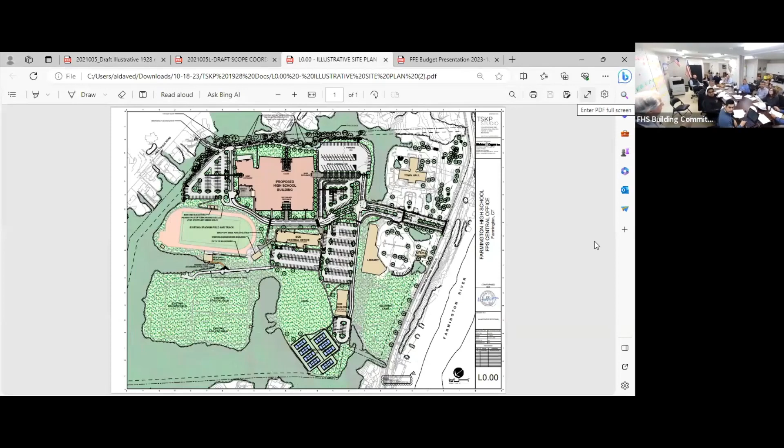This was not handed out, but I sent it to Devin at the last minute. This is just a reminder of where we were before the 1928 referendum was decided. We had placed the tennis courts here, to the south of the 1928 building. Then when the decision was made to include the 1928 building on this site, we had to make some changes. So now we can go to the next slide.

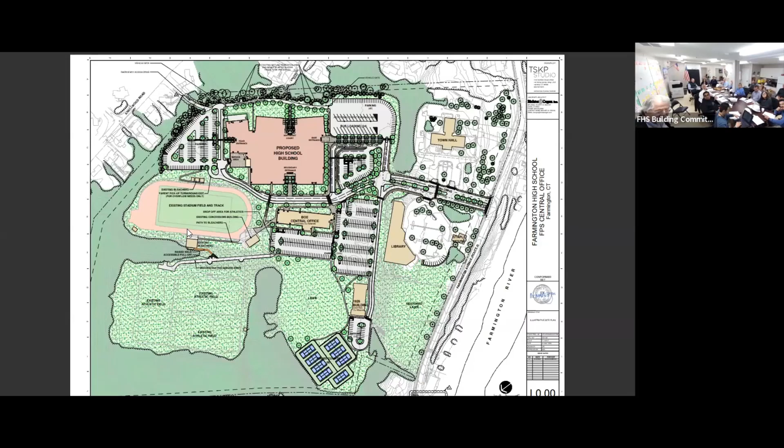So the first thing we did, we had to meet with Silver Petrocelli and determine what's the dividing line between projects. So we created this diagram so we had an understanding between both design teams as to what's in the high school project and what's in the 1928 project. This red dotted line represented that delineation.

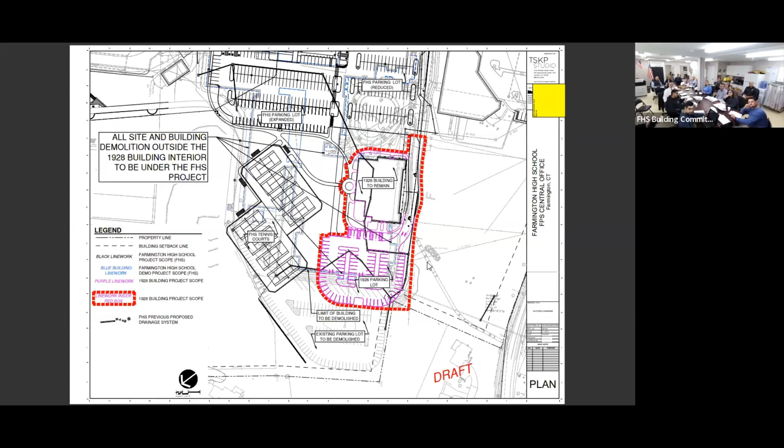And then we've proceeded with the design work. We're now in the design development phase. Next slide.

This is the diagram that was handed out. So you may recall the tennis courts were here. We've now placed them to the northwest direction, north of the 1928 building. The delineation line between projects is shown similarly around the 1928 building and its parking lot, which is located here, to the south of the 1928 building.

So all this diagram represents is changes that have been made in the parking here. The configuration of the parking is a little bit different. And then the same number of tennis courts, 8 tennis courts for the high school. It's exactly what we had previously, only those were located down here.

There's been some changes in the walkways between the parking area, the 1928 building and its parking lot. So those have been now located. And then we have some plantings. I think there are a total of 8 additional trees.

We're going to release not only this drawing, but all of the utility drawings, the topographic drawings to O&G so that O&G can start budgeting.

We're looking for a big credit. Yeah, big credit.

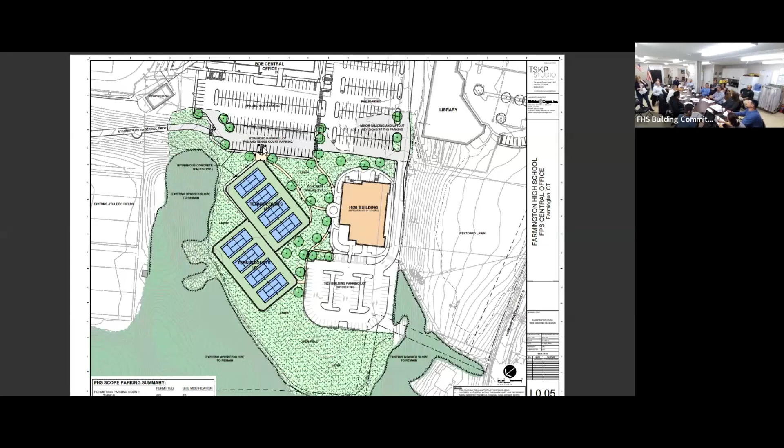Okay, Susan. Yeah, Susan's giving an FF&E presentation, because later in the agenda there is a motion to approve the bid package. So we'll get through it now during the architect report, so when we get to the motion, this is related.

I just want to start off by letting you guys know we had a really great team to work with. Sam helped us out, Scott was involved, Russ was involved, and Kim and Kathy all contributed quite a bit. We spent a lot of time looking at furniture, kicking the tires. There was a pilot classroom, we got samples in, we visited showrooms. So there was a lot of thought that went into all of this furniture to begin with. The whole concept is we want to make sure it's stuff that's going to last, that works for you today and works for your curriculum later down the line. In light of that, we made sure everything was as flexible as possible. We want the students to be happy and comfortable, because when students are comfortable, they learn better.

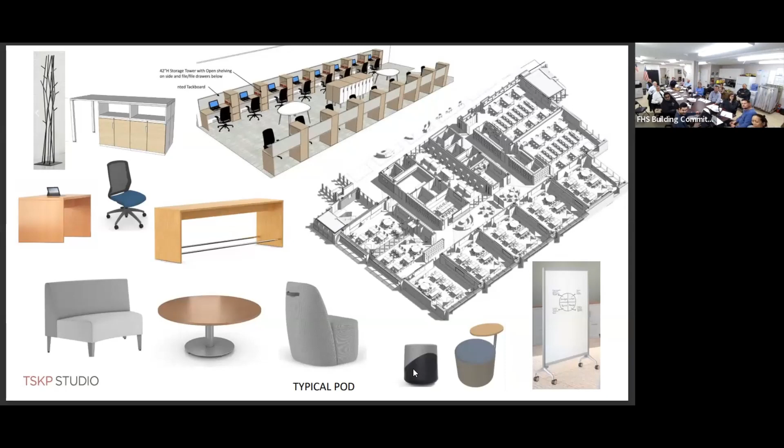Just to hone in a little on what we have for the classrooms, we have an array of furniture. We spent a lot of time looking at classroom furniture, and this will give you maximum flexibility so students will have a choice. They can sit at desks, standing height tables, or round tables.

All of these things can be moved around, they're all on casters. The desks themselves are like wheelbarrow type movement, so they have casters on two legs and just glide on the others. They also stack, so if the teacher wants to open up the classroom and have a lesson, they can pile them up, push them off to the side, and everything can be done on the fly with no downtime trying to rearrange the classroom.

These are standing height flip top tables that will have a dry erase work surface, so students can collaborate, flip it up, and share what they did with the rest of the class. We also have mobile triangular tables that are standing height with a little foot bar for further collaboration. And this is the half round table you see here, which will have casters even though we just wanted a picture of it.

For the seating, the chairs you see up there have been tested. They're very, very comfortable and durable, and they have a lifetime warranty. We have adjustable height wobble stools, task stools, and these cantilever chairs that have a little bit of bounce to them, which makes them really comfortable.

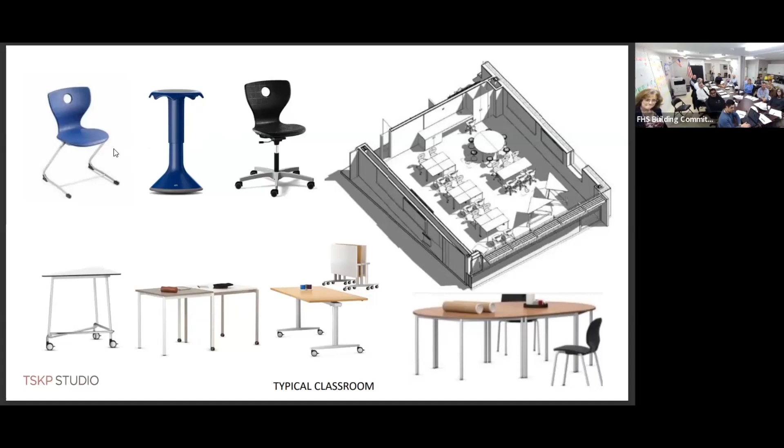Moving on, this is the main concourse you guys just walked through, and this should give you an idea of the aesthetic we were going for. We wanted something to really have that feel—it does sort of have that mall feel, university feel, better word. That's really what we were aiming for with this, and you'll see it in the cafeteria as well. We really wanted it to feel like a grown-up space, not super institutional looking.

So we have plenty of soft furnishings, high tops and low tops and bar stools, and some planters in here. This particular piece is a mobile green wall that will come with its own little tank, like a 20-gallon tank, and grow lights, and it's self-watering. I made sure these are located where you have power in the floor. Kim was talking about possibly opening up a horticultural program, and this could be part of that, as well as the plantings in the planters themselves.

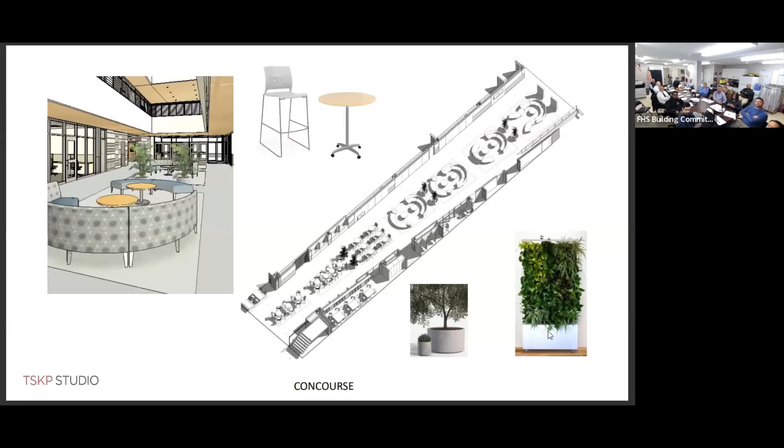Cafeteria—again, we're going to have some more planters. And what we decided to do to break up the space a bit and bring down the scale, we've got rows of these banquettes you see here with dividers between them. This gives them not just a way to break up the space, but also an alternative place for kids to sit when they're eating.

The chairs are high density stackers, and the tables will all be mobile flip top tables so custodians can roll them together and off to the side to clean. I know Sam would have liked something different because of maintenance, but we were trying to avoid the institutional look we'd get with folding cafeteria tables that have attached seats. So this felt like a compromise.

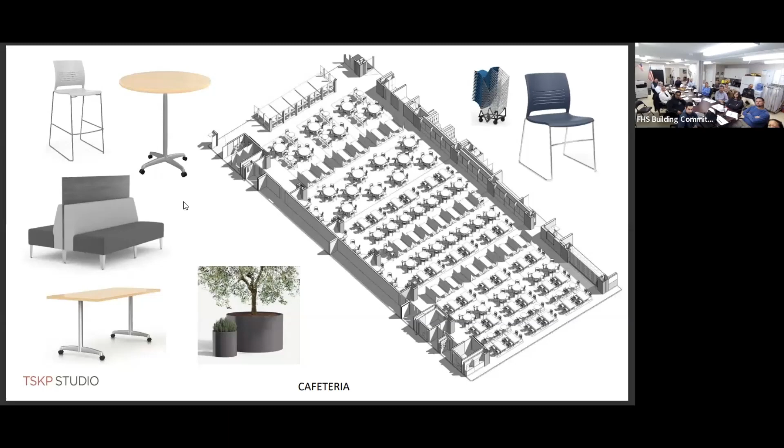Now we're looking at the media center, which looks down over the cafeteria. It has plenty of soft seating, places like these pods, privacy pods with seating that has privacy sides. This gives kids a place to study independently, but there are also a lot of places for them to collaborate. And of course, the library is no longer really a library, it's a media center.

Because there's so much electronics these days, power will be located in a lot of the pieces of furniture so students can plug in and charge up while working in there.

Over here is where you see the Edge Studio. We're going to have a TV broadcast desk in the furniture package, and then there's the media center classroom, and we have a special workroom over here. So let's go to the next one.

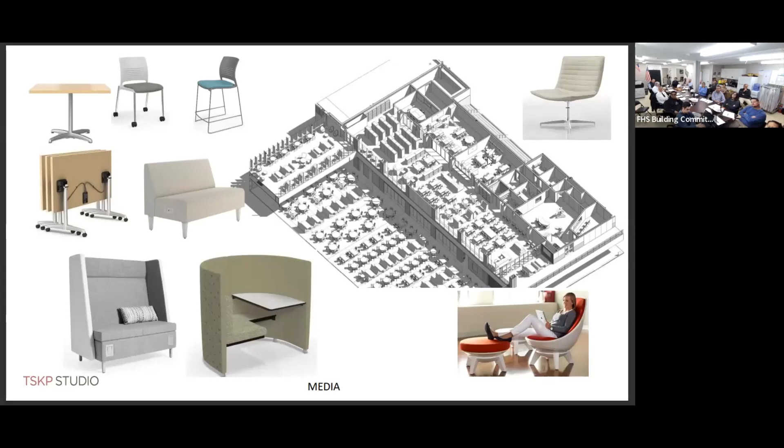The offices, this is typical of the furniture you'll see in the office. It depends on who's using the office, how often they're in there, and their particular needs. So if they need more storage, they'll have more storage, and if they only need a place to touch down, that's what we'll give them. This just gives you a general idea of the aesthetic we're going to have.

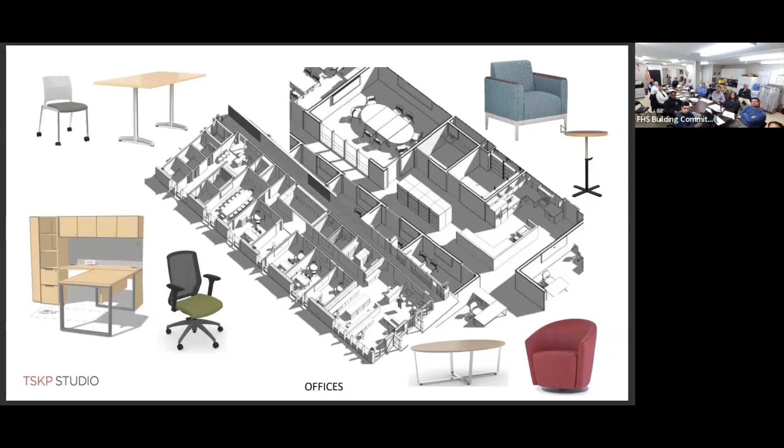These pieces are examples of what you might see in some of the waiting areas in the main office and outside in the career and counseling offices. There are a lot of admin places in this building.

We've got just your main office, of course the career counseling center, all the department heads, all of the athletic department people, the coaches, everybody—there's a lot of people. You also have your sped people, your alt high school, and everything else. So there will be quite a bit of admin furniture in this package.

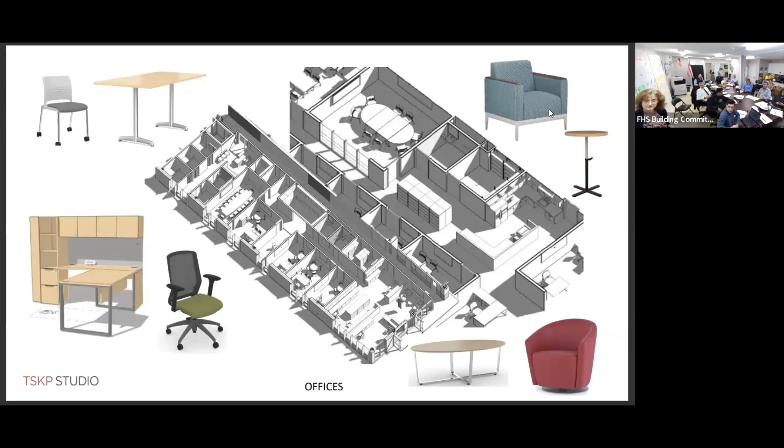Okay, so this is the music area. We want to make sure we're providing secure storage for the students' instruments because they're pretty high value product, and we don't want anything walking away.

You can see here in the corridor, this is where we have a lot of the music storage, and there are also two rooms in between—this is the band room, that's the vocal room. In between is storage for things on open carts, like string instruments. Each of these two rooms will also have a conductor stand and music stands. These are posture chairs specially made for people playing musical instruments. I think that's it for this.

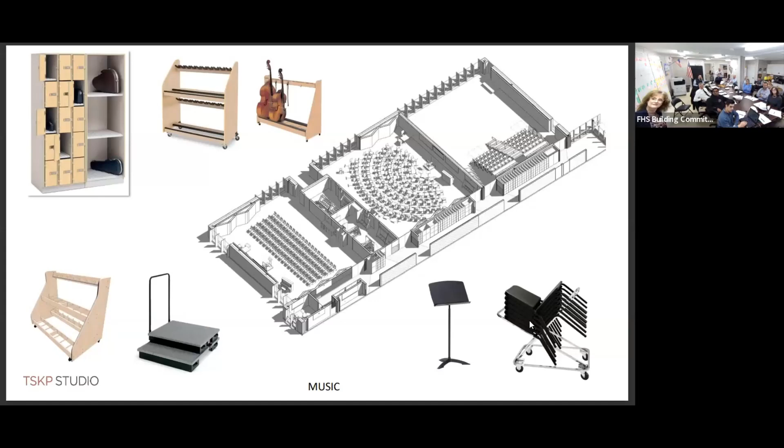Okay, art studio. We have this entire C-wing, second floor basically for art, and we have a ceramic studio with a kiln. We've got what you can see here for equipment—we have a pug mill, which they use to recycle all the scraps of clay after class because there's always leftover. We have a clay extruder, a ware cart, and a wedging table.

All of the teachers, all of these classrooms are going to have some version of mobile storage in them. Again, that's in the name of flexibility—trying to make sure that if you have greater need for storage in another room at some point, you can just wheel it into another space.

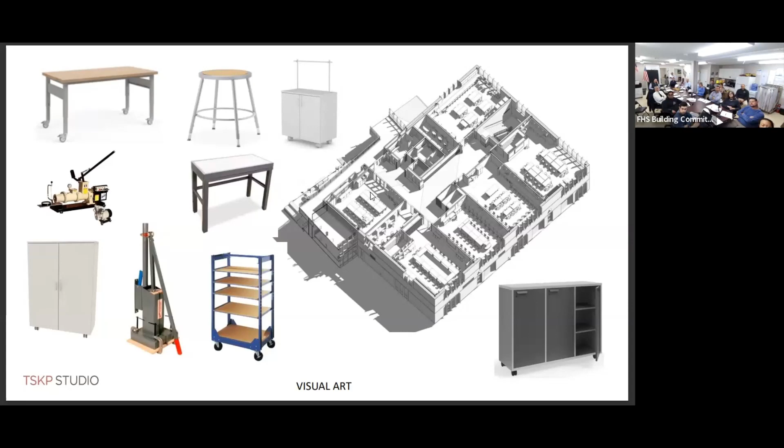So this is your 2D room, you have a digital room, a photography room, a craft room, and then this is a maker space right here. That's going to have a little flexibility to it, but will basically be overseen by the art department. On the first floor, just below this, there's a STEAM lab as well, and I'll talk about that in just a second.

Let's go to the next slide. Here we go, technology—so these right here are the engineering room and the app lab.

You were standing in the engineering room when we were looking down into the gymnasium - sorry, it wasn't the cafeteria. So that was the engineering room we were standing in and looking down into. And the app lab is right next to it.

This is for very technology heavy courses. Aside from having the computer desks, which they're going to need, they have a huge amount of product they need to store. So because they needed additional work surface for projects and everything else, we are providing them with these mobile storage units. Some of these will have power in the work surface so they can plug in whatever it is that they're working with.

It's a mix of different types of storage so they can have that flexibility. Another thing is we're hoping to have slat wall all around the perimeter - we should have it. We're also specifying all of the accessories that go with that slat wall, again in the name of flexibility, so those pieces can be rearranged however they need in order to accommodate the products they need to store.

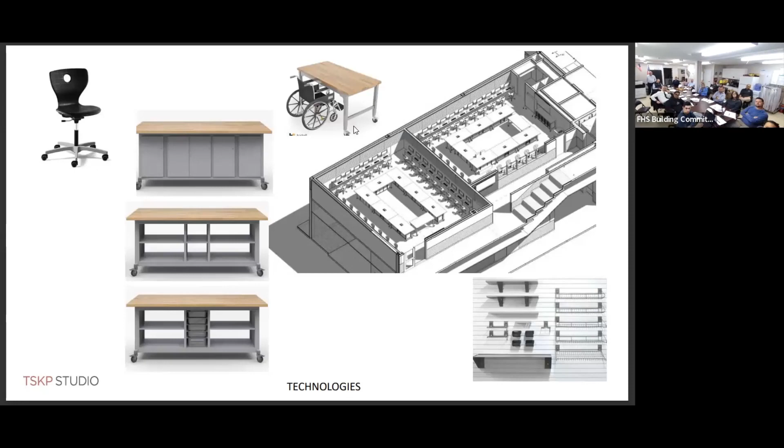So the bottom line is we had a dollar budget of 3.6 million. The estimate is 3,428,429, and that will leave us with a contingency of 171,571. Hopefully, if you guys are all on board with this, we would be thrilled to get the approval tonight.

If you need to see anything else, this is sort of a high level view. I didn't want to bore you guys with all the little itty bitty things because they can get pretty boring. But in the packages that went out, you will see the item data sheets, which had every single piece of furniture in the entire building. So if you want to drill down and really see it, you can look in those packages. That's the end of my presentation. Does anyone have any questions?

No, I don't think we'll do that. So let's talk about the cafeteria, just because I also work in a high school and I see the custodial staff - it's a lot of time, every single day you're moving every single chair. So did you guys look into that as an option? I know you don't want the industrial feel.

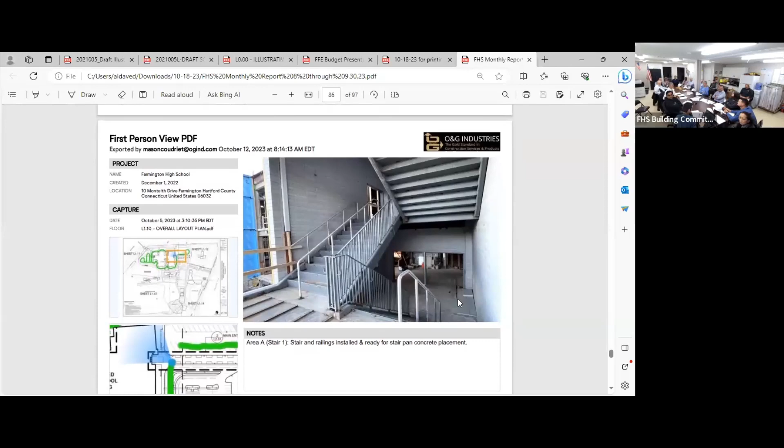I'm not going to go through all the pictures, but my report is self-explanatory. Those photos are all from last week, period ending, but I like to get photos a little bit later.

So basically, your building A pod is on the far end, your building B pod -- as of this point this week, all those windows are in, and they're starting the sunshades on that east elevation.

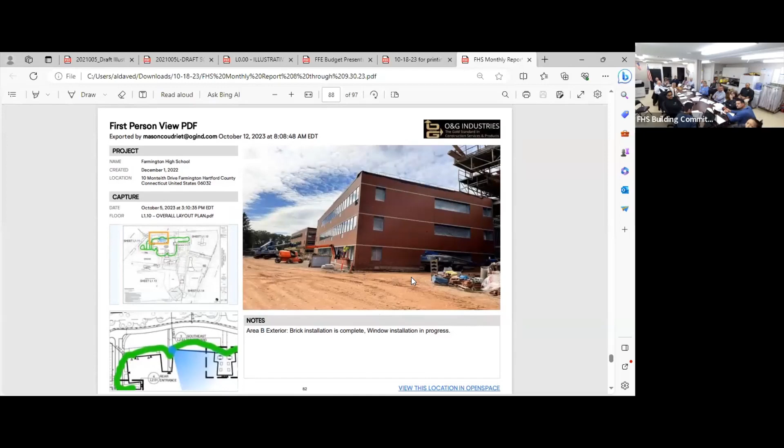That's your third floor. We weren't able to get up there, so your breakout space -- Susan showed you the furniture package. You'll have furniture here and back here, but you're going to have coffered ceilings with skylights, so that third floor space is going to get a lot of natural light.

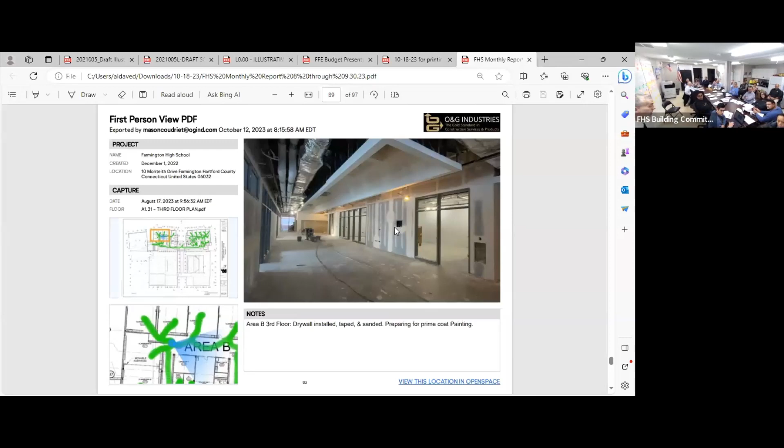And then you have your teacher's workroom, with some monitors here for a teaching wall. I think these are the small group breakout rooms.

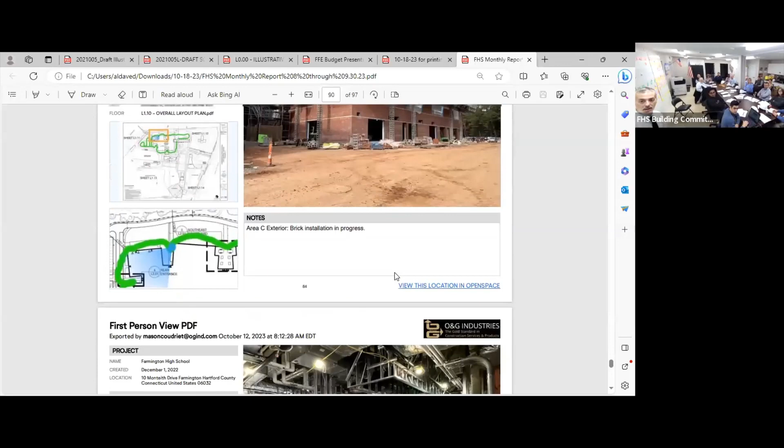Last week they had the scaffolding up, this week they're washing down. So this hydromobile scaffold is on the opposite end of the building. The overhead doors on the inside have been installed, so you have your wood shop on this side and your auto shop, which will have your car lifts, on the opposite end.

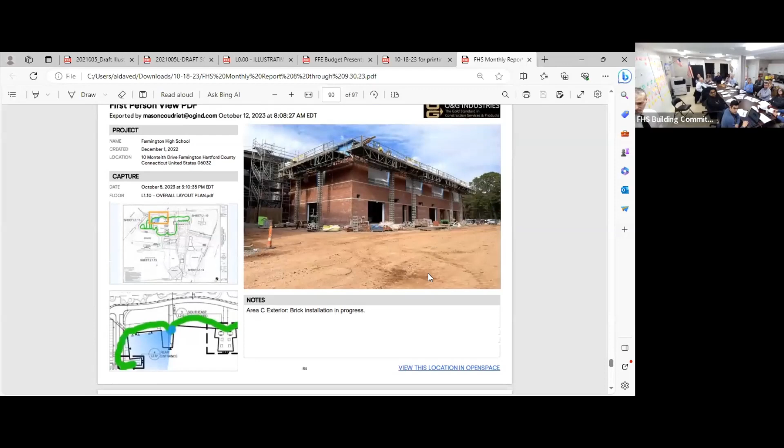This is the area C art studio wing, where you have your 2D, your 3D technology, and your STEAM classroom. This is going to be another coffered ceiling. This is on the second floor, because that part of the building only has two floors.

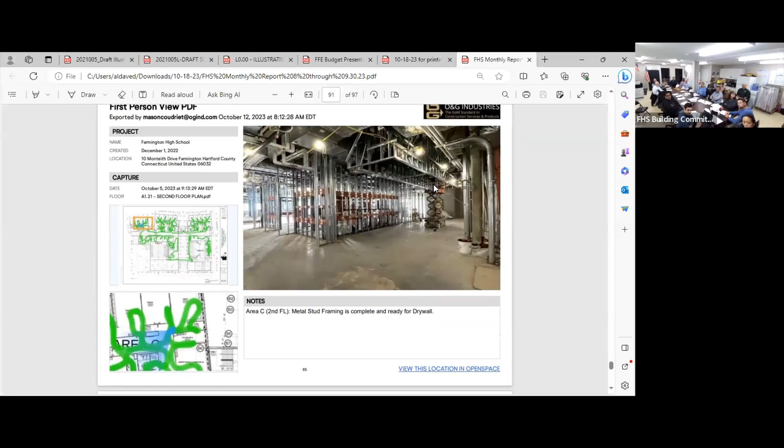Back of house mechanical room -- this is behind the culinary area. There's more mechanicals installed as of this week, but this was last week's photos.

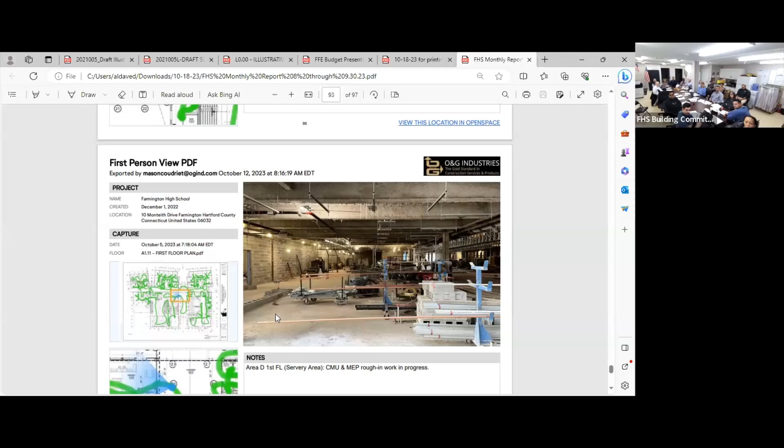This is the cafeteria servery area. Where we were at, we saw it on the first floor -- in the direction we were looking, it was to your right-hand side. The kids' point of sales, your kiosks, your servery tables will all be in this area. They already started the first course of block, and on the far end they started that ground face as well, but you can't see it in this picture.

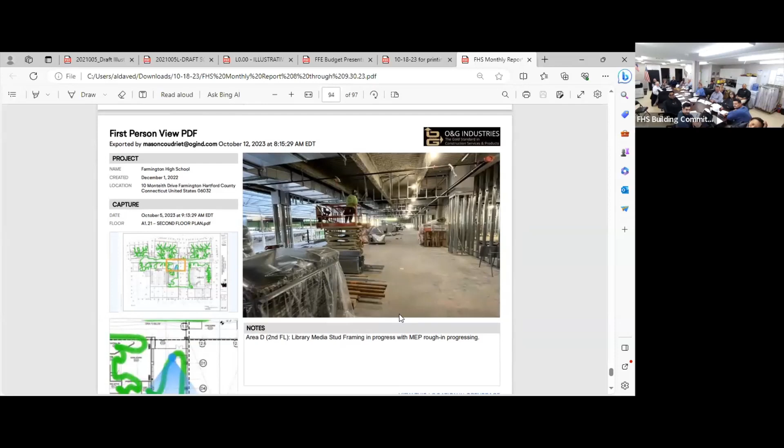And this is your media center -- I will not use 'library' anymore, it's your media center. Right now they're working on soffit work. On the far end you'll be able to see into the cafeteria through window walls or through open areas.

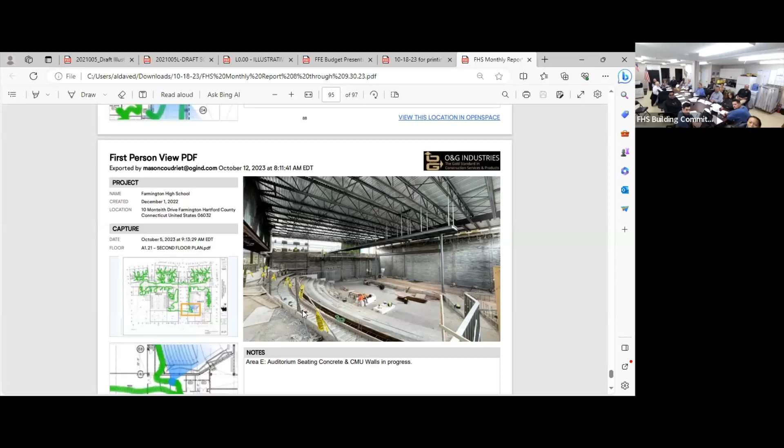This is the auditorium. When we were in there, they placed the last course of concrete today, so as of last week, the concrete is almost done. That's your proscenium opening and your stage area. Where you see the rebar, that'll be a masonry wall -- that's going to be the scene shop storage.

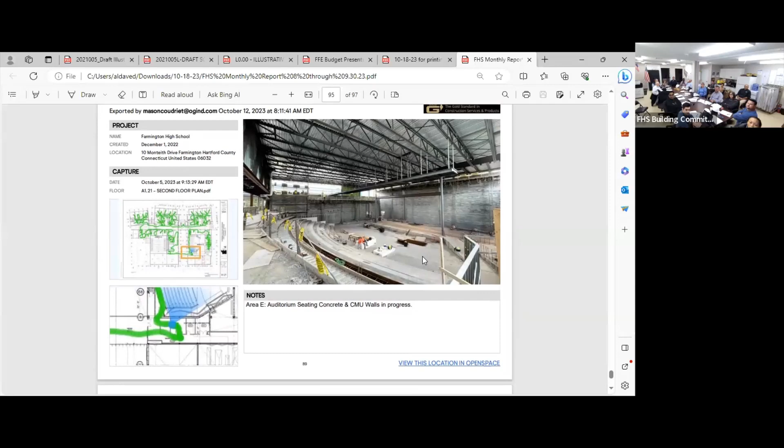We stayed away from the library side because of the temporary student lot -- there's too much activity with students using it, and we didn't want to interrupt that traffic pattern.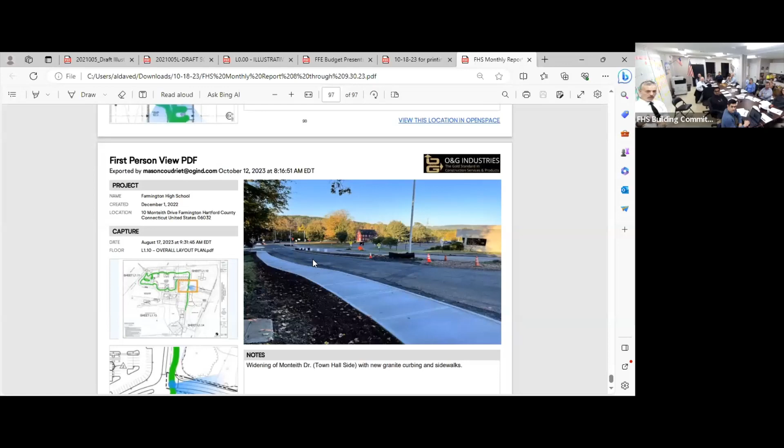And CNG, by the end of the month, will do their final connection to the street, and then we can finish that work off by the traffic light on Route 4. I think that's it -- any questions from the tour or my report?

All right, moving on to communications subcommittee report. We met right before this meeting. We were reviewing content for a newsletter that we're hoping to send out right before Thanksgiving, updating the Q&A schedule, general updates, progress photos, stuff like that to get out to the community. On our website currently we have a drone video taken probably in the June timeframe. O&G has another drone coming this week to get some updated shots, which will be really cool to see that progress. So moving along and continuing the updates to the community. Something we discussed with O&G is tying that into the newsletter and website, because we think that's a great thing we need to do to promote the connection with our students and the school and what you guys are doing.

Great. Any questions on communications? Thank you very much. Professional Partnership Subcommittee.

Professional Partnership Subcommittee met this week, two days ago on Monday, to start the conversation about some professional partners that we're going to be bringing up for services we need in the near future. They'll probably start meeting a little more frequently to get things going and bring them forward. Everything will go through this committee, so you'll probably start to see some things next month coming through that subcommittee.